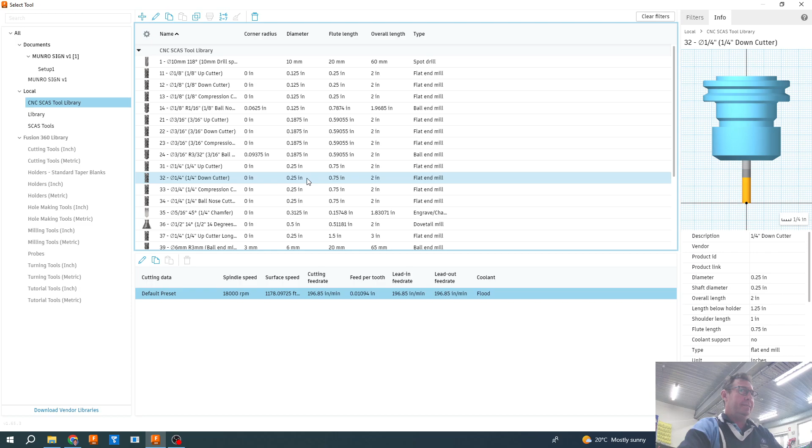Hitting select, you can now see that our toolbar changes to the router head of the machine, and we've got all these preset feeds and speeds.

Now, tool 32 is actually a router cutter, and its speed is way too fast. So we're actually going to change that from 18,000 to 1,500. Now that will instantly change all our plunge feed rates and everything to suit that spindle speed.

So make note of that. If you're drilling, the drilling speed needs to be much slower than a router cutter.

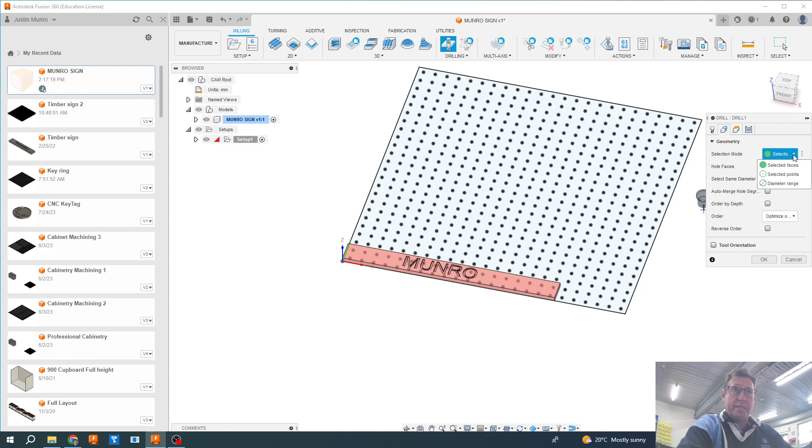Okay, so once we've got our tool selected and our feeds and speeds right, we're going to move across to the geometry. Now the geometry we want to select in this case, because we want to drill holes so we can bolt our piece of timber down, is we want to put 4 bolts basically at either end of our piece of timber.

So we're just going to hit this dropdown menu to selected points. Scrolling in here, we're going to select the 4 points, 2 at each end of our model. That's where we want to drill our holes, because that is exactly where the bolt down marks are on our CNC bed.

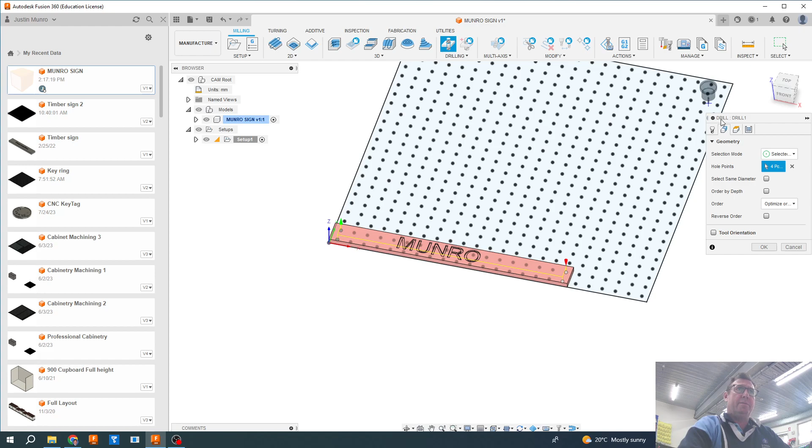Okay, once we've selected the points, we can move across to the heights. Now the heights indicate the height that the drill bit will be sitting at in the machine and how far offset that drill bit will be from your model.

So the retract height is the stock top offset 5 millimeters. I like to add a little bit more clearance here, so we're just going to change that to 10. Same with the feed height.

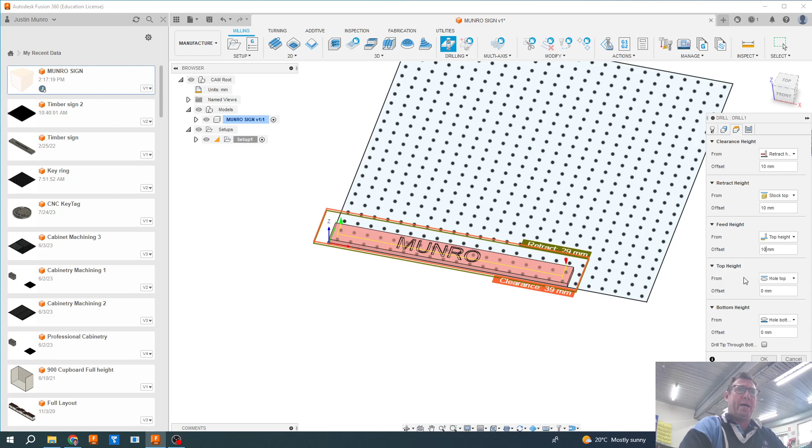I like the drill bit to spin a little bit higher than the timber and slowly come into it. Now the top height, currently we've got as hole top. Now we haven't selected a hole, we've actually only selected a point, so there is no hole top, so we need to change that hole top.

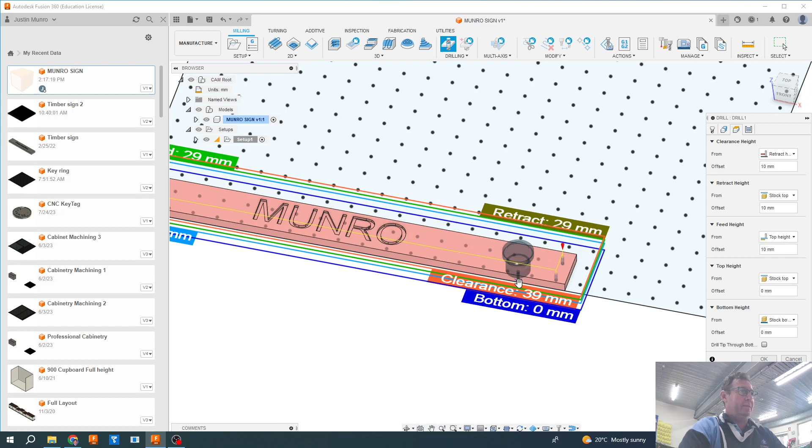To stock top. And we want to change the bottom height to stock bottom, that being our model. We can also then, because we want to bolt this down and the drill bit has a tapered tip, as you can see just there...

What we want to do is actually allow our drill bit to go through the bottom of our material. So we're just going to go drill tip through bottom, and we're going to add 0.5 millimeter to that figure down the bottom.

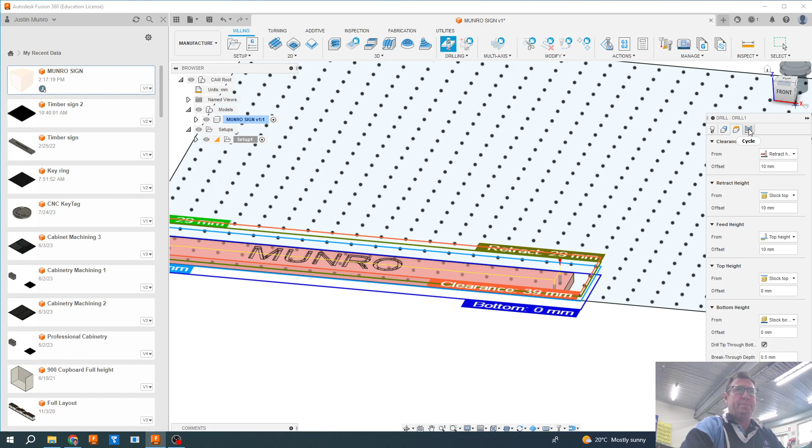Now we go across to the next tab on the top, which is cycle. Here it's saying drilling rapid out, meaning our drill bit will plunge through the piece of timber from top to bottom in one pass. That's not good practice for a drill bit, as we'll typically snap drill bits quite quickly and readily if we do that.

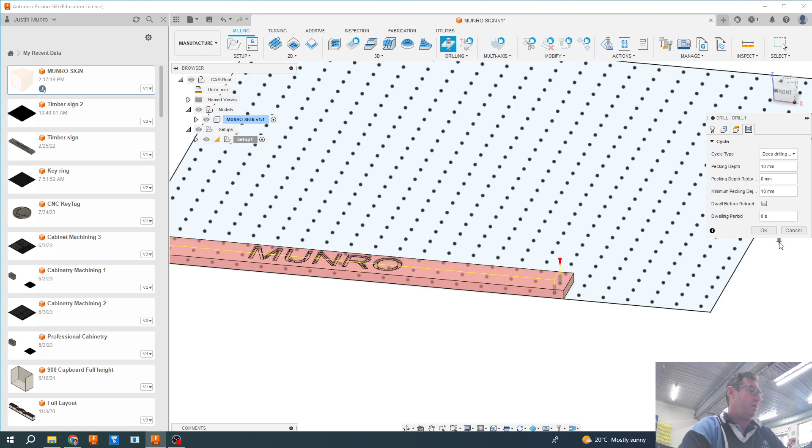So I'm going to hit this drop down menu and go to deep drilling full retract. In that we can set what's called a pecking depth. For drilling, it's a rough gauge, so we're going to set it to about 10 millimeters. That means the drill bit will go in and out 10 millimeters at a time and clear any of that timber that gets caught around it.

Pressing OK, you can see our model turns to green and we get a range of tool paths here. These tool paths are essentially what the router is going to do.

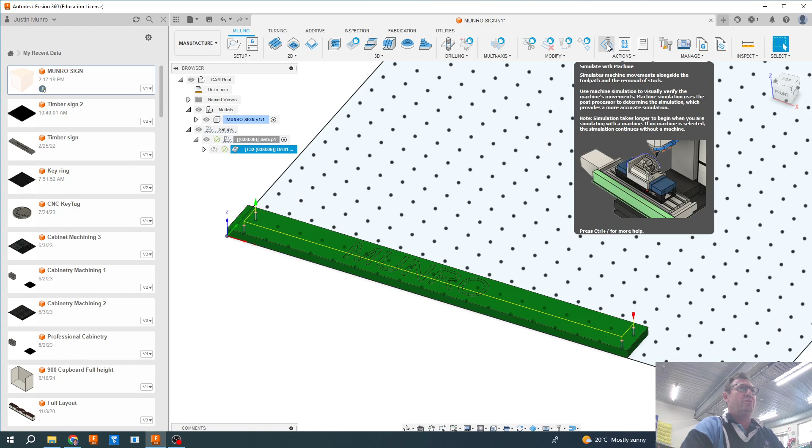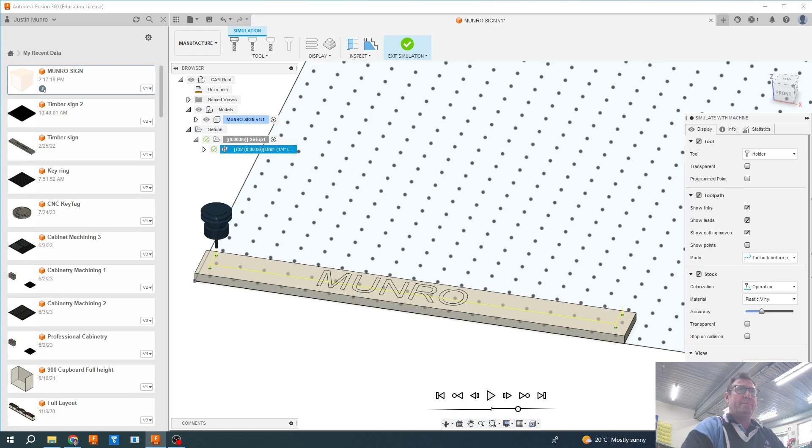So if I go up here to simulate and click on this simulating tool, I can turn the speed down a little bit so it's not going too quick, then press play and see exactly what my router is going to do. It's going to go in and out twice on each hole and drill the 4 holes, and that's the order it will do the holes in. So it'll drill that one, this one in the corner, and this one. I'm quite happy with that.

Exiting simulation, I now need to do a 2D pass to cut out my lettering. So I'm just going to come up here to the 2D drop-down menu and select the engrave tool.

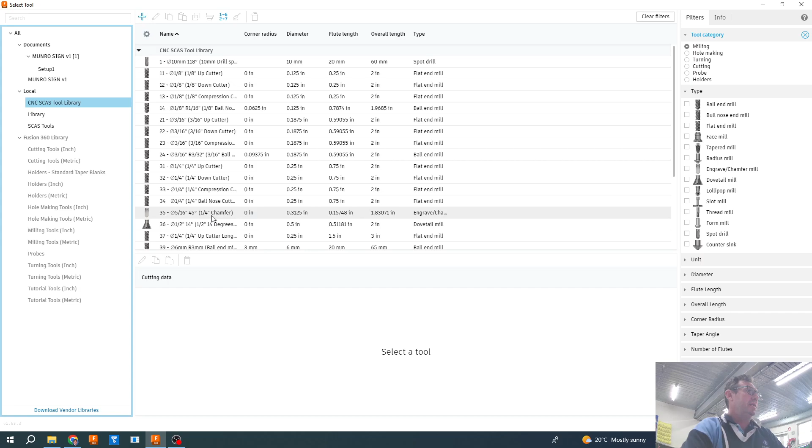Once the engrave tool comes up, I get the same toolbar that came up before. I'm going to select my tool. The tool I want this time, if I jump into the CNC SCAS tool library, is tool number 60, which is a 45-degree wide chamfer cutter. Hitting select, this tool immediately sets all the correct feeds and speeds for me.

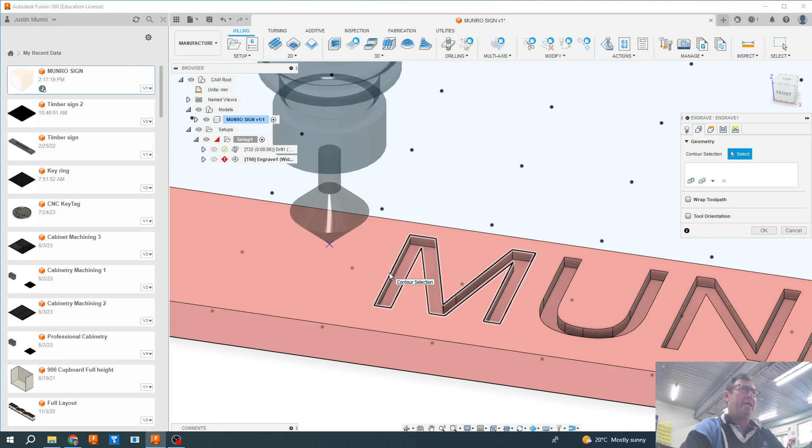So the next thing I need to do is select geometry. With an engraving tool, the geometry we want to select is the top of the lettering. So I'm just going to cruise through and select the top of the lettering for each letter.

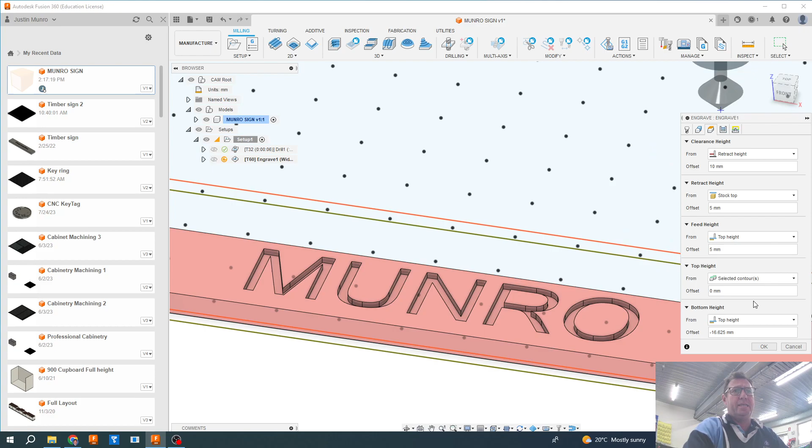Once I have them all selected, I can go into heights. Not much needs to be changed in here. We want the bottom height to be the top height minus 16 mil, which would be the width of my lettering. Stock height, you could change the clearance if you wanted to, but 5 mil is going to be fine for what we want to do, and it's going to do it in one pass. So we're just going to hit OK now.

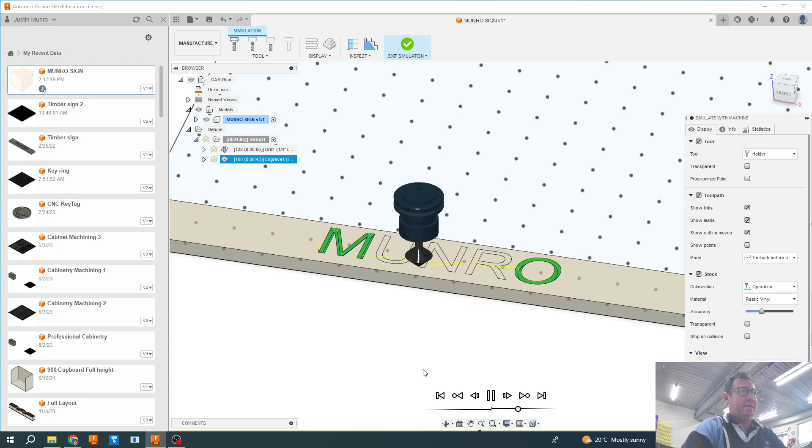What it will do now is give a range of toolpaths. If I hit simulate, it will do the engraving. You'll be able to watch it do the engraving. Here you want to look and make sure everything you want the machine to do is doing it correctly, and that it's not doing multiple passes or anything like that.

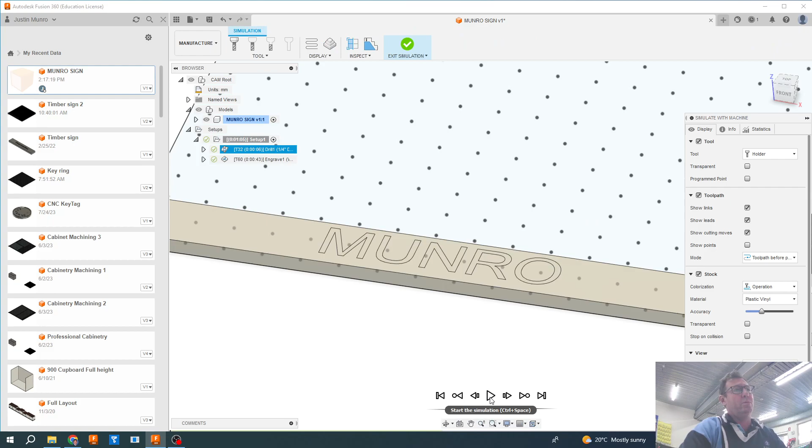Exit simulation. Now what we need to do is come up here to our setup and select our setup. It's good practice to hit simulate now and watch it run through all the toolpaths you've done. We've only got 2 simple toolpaths here, so it'll do the drilling operations, drill the 4 holes, and then do the engraving of the lettering.

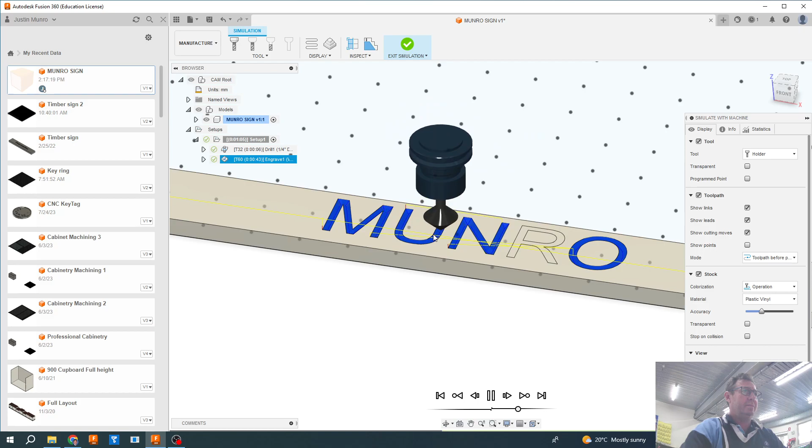Once that's done, I'm going to hit exit simulation and save my work. And now it's ready to be sent to the CNC machine.